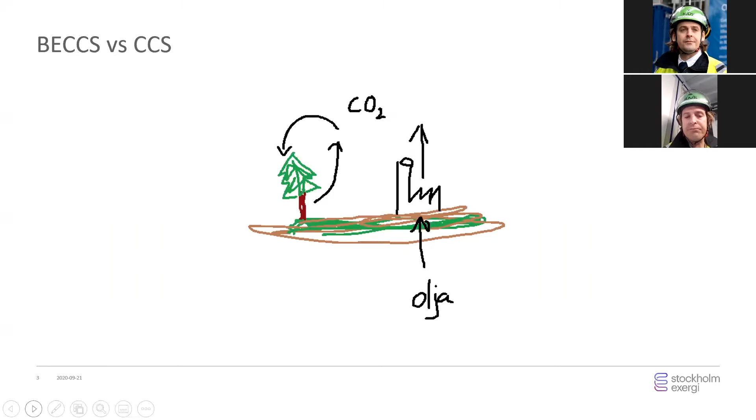While biomass, if properly used, with sustainable forestry where you replant trees after you take them down and use them, or trees replant themselves after they fall and are left to rot in the forest, then we have a circulation of CO2 from the atmosphere to the biomass and then back to the atmosphere. So that's the basic. Let's take the next slide, Jonas.

When we talk about climate change abatement, we have two options. We can reduce fossil emissions—basically switch to other products, or stop using fossil fuels. Or, as in carbon capture and storage, we take the emissions from fossil fuels and put them back in the bedrock. For those emissions that for various reasons we can't reduce, we can counter them instead. That's why we talk about bioenergy CCS.

Through photosynthesis, as trees bind carbon from the atmosphere as they grow, that gives a cycle of carbon atoms from the atmosphere to biomass that collects all the carbon, and then we can store it in the bedrock. So in climate change abatement, we have two options: we could either reduce emissions or counter them with these so-called negative emissions. Biomass CCS is one of these technologies that provides a flow from the atmosphere into the bedrock.

Instead of a tree, we could put a factory instead, and then we'd have what is called direct air capture, which uses membranes or something else to catch CO2 directly from the air. But the whole thing biomass does is concentrate all of that CO2 that's in the atmosphere into the cellulose, and then it's possible to use it.

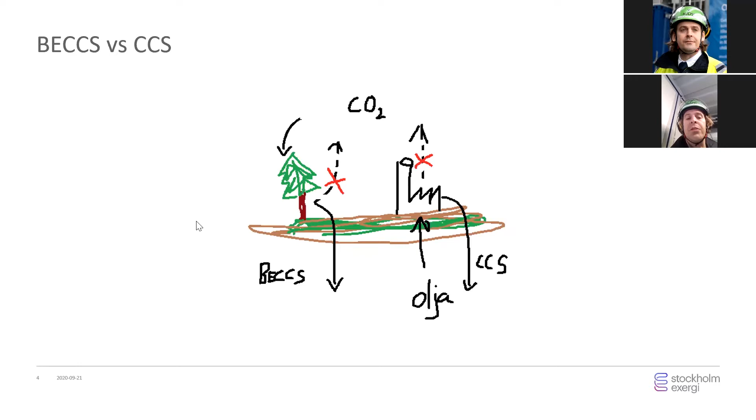So next slide. When talking about climate change abatement—and sorry for some of the headlines being in Swedish, so this is a little bit Swinglish in this short presentation before I show the test facility we have—the background for BECCS is that almost all pathways that provide solutions to meet the Paris Agreement require these negative emissions.

So there are emissions that we can't reduce because there's a lack of technologies, or a lack of economically feasible options to reduce it. In Sweden, a governmental inquiry has, for example, seen that you have these diffuse emissions from the agriculture sector.

For example, as you plow agricultural land, you have a release of nitrous oxide, and that's very hard to get to. So if you want to address all of these things that you can't reduce for various reasons, like in the agriculture sector, you might want to counter it with these measures called negative emissions. Globally, we're talking about quite a lot in all these scenarios that IPCC works with—they have these big models that they run, trying to find solutions for how to reach the Paris Agreement.

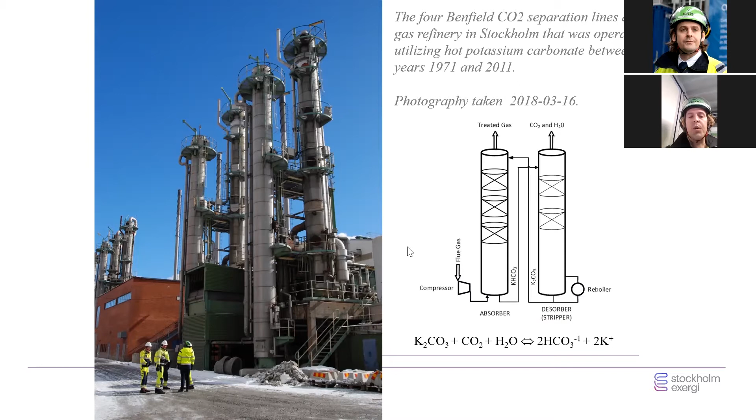In spring 2019, in the spring budget, the government added some money so that you could provide these test and research facilities and demonstration facilities for testing this carbon capture technology. So what we did is we supplied an application to the Swedish Energy Agency, which was approved in August, and in about 4.5 months we could build a test facility to actually test this technology. And I'm standing in it right now, which I think is really cool.

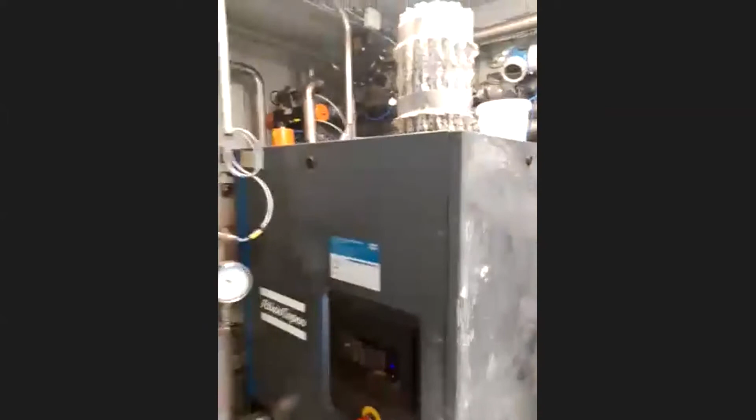And it looks like, if I'm able to turn my camera around... it's always interesting when you do this on the mobile. So the test facility looks like this. You can see Jonas sitting in one of the corners right there. I'm just going to change this screen.

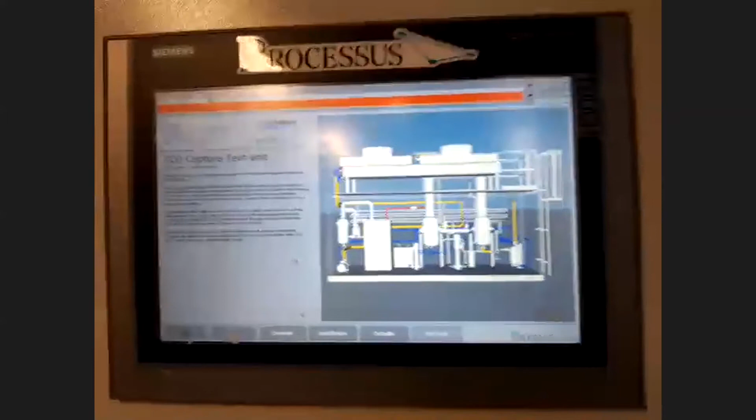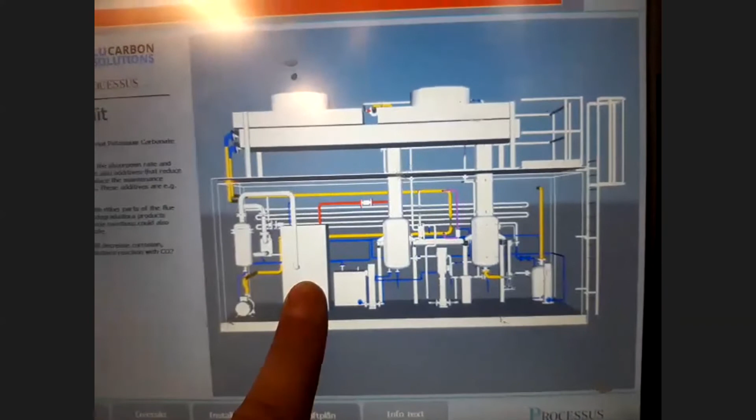And this facility looks like this. What you have here is basically the same thing as we had in the gasworks here in Stockholm previously, that was operated for a very long time. So we take the flue gases in, and it goes into this regular Atlas Copco compressor and compresses the flue gases to around 6-7 bars.

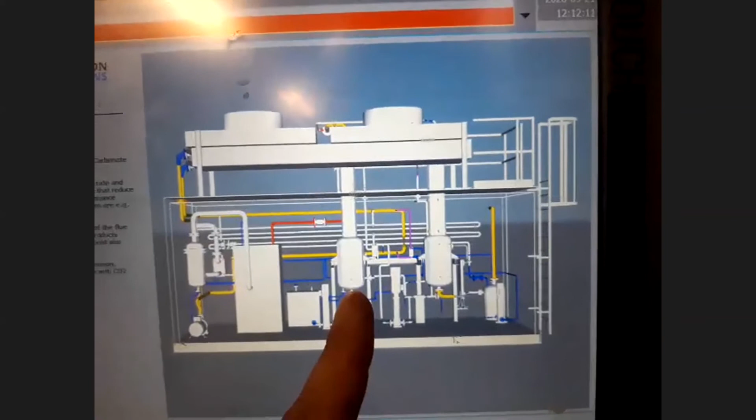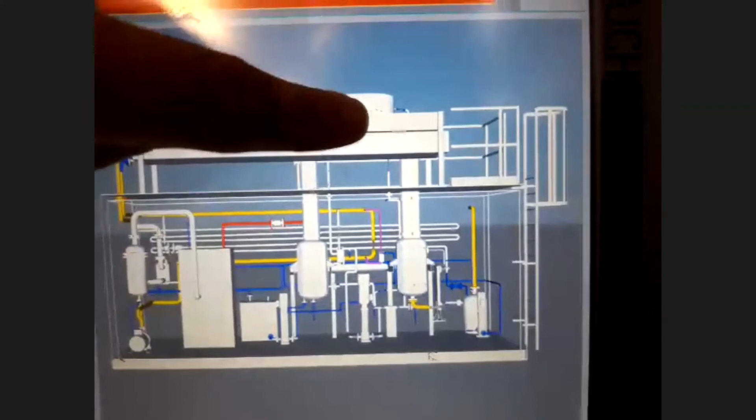Then it's taken into this absorber that's here, where the flue gases come from below, mostly nitrogen gas, which is sort of the normal compound of air, and then you have 18% carbon dioxide. The carbon dioxide then goes up into this absorber with the nitrogen gas, and the potassium carbonate flows from above like this, and they meet with each other. Then you have a reaction of this. Here is the actual absorber and the compressor.

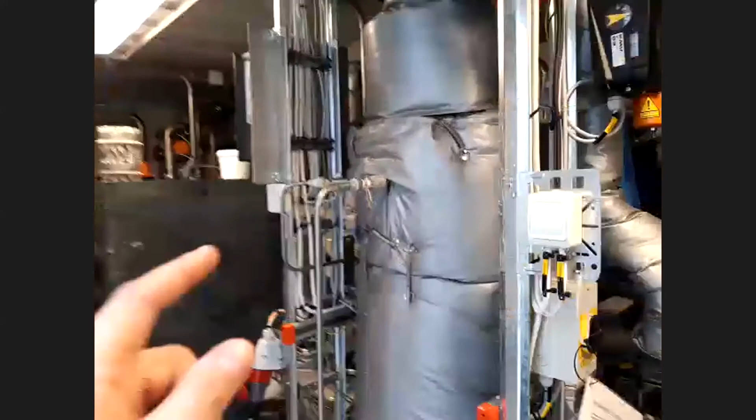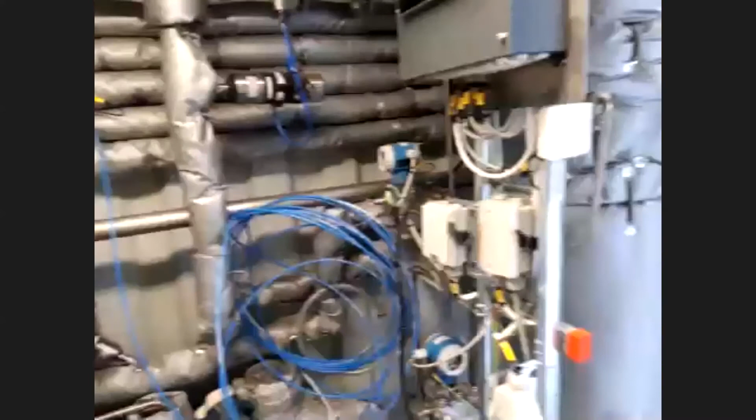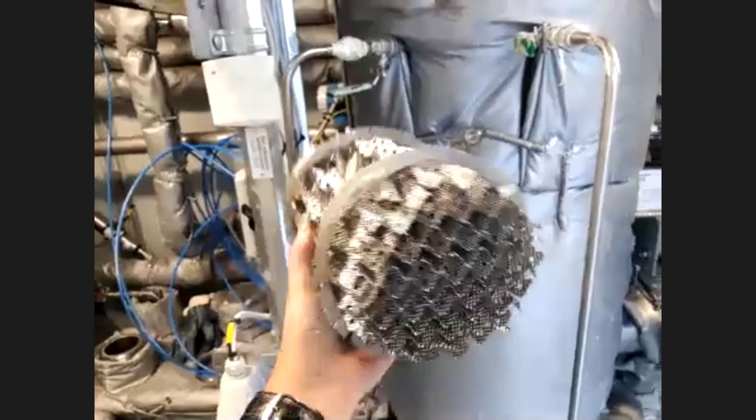So the flue gas comes into this compressor, and then it goes into this absorber. In this absorber, that's just a pressure vessel where you have this kind of packing material. So this is nothing magic - it actually costs quite a lot, but it's nothing strange, or it depends on what you're comparing it with. It's just big cylinders filled with this packing material, about 1 meter of it inside this cylinder.

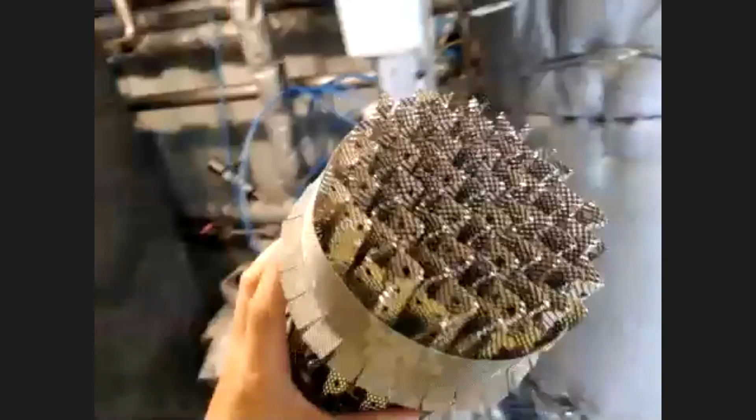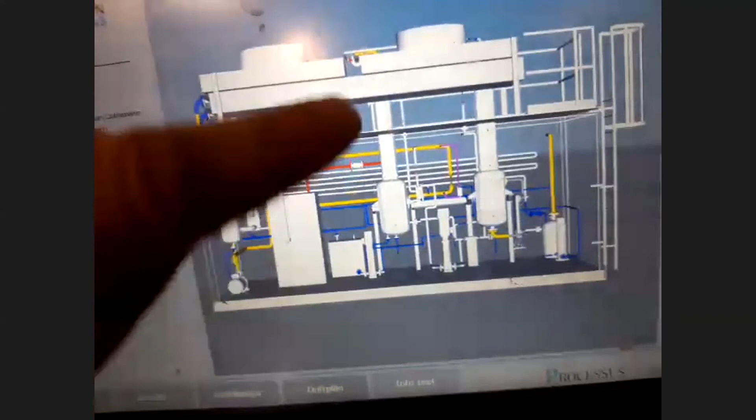This is just to provide a big area as the potassium carbonate is flowing from above into this absorber. You want as much surface area as possible as the potassium carbonate, about 30% mixed with water, flows through this absorber. Then the flue gases go up, and because it's pressurized, you have this reaction where the potassium carbonate forms bicarbonate. So basically what you're doing is creating baking soda.

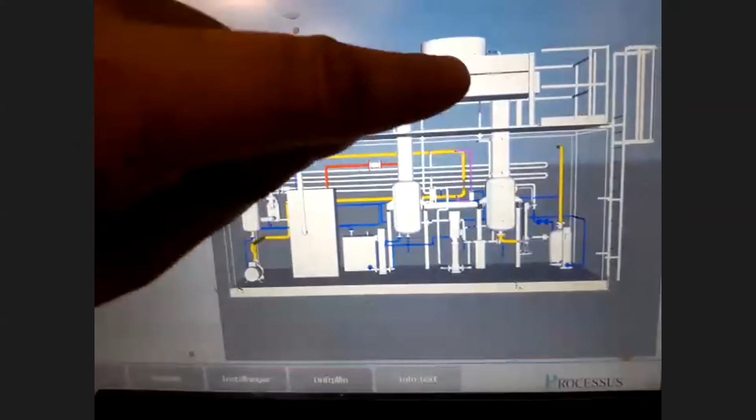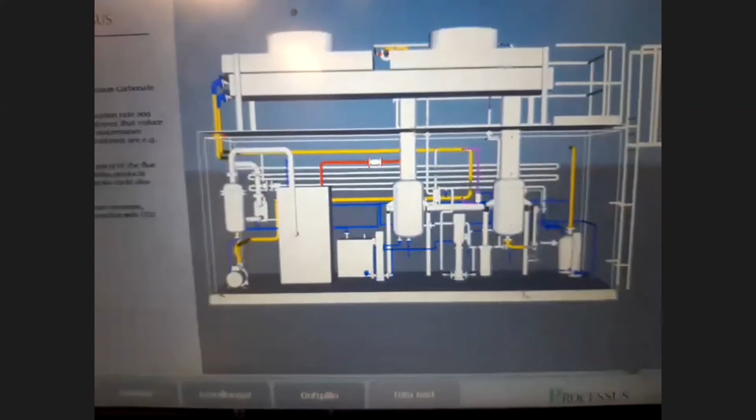Then you pump all this potassium carbonate up above, and let it stream down into this second column, this vessel which is also filled with that packing material. Then you release the pressure to atmospheric pressure and increase the temperature to 105 degrees. What happens is the same as in a baking oven - the bicarbonate releases the CO2, and you have a clean stream of carbon dioxide that you can then transport, compress, and take away.

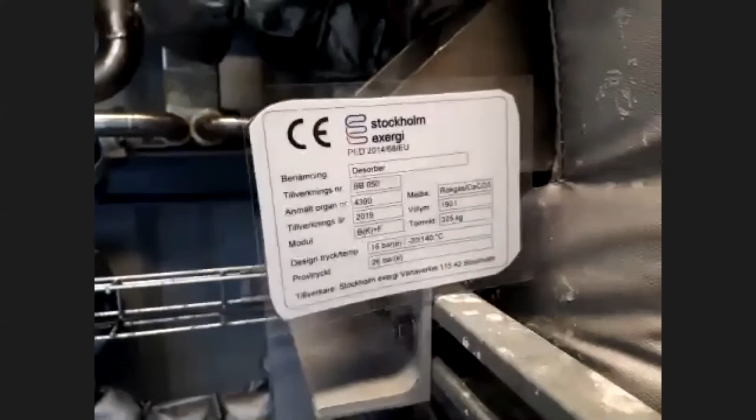So yes, I think it's really cool. This particular facility is also something we're quite proud of. With the help of consultants, as I told you before, we could make this with the help of this mechanical firm in Norrköping called Guidningen. We could make this and produce this facility.

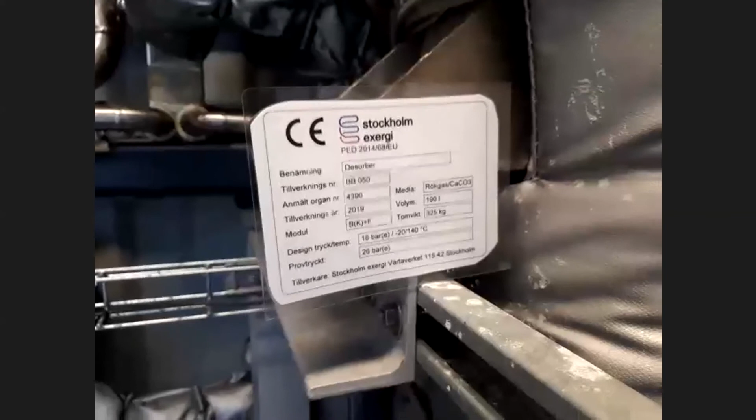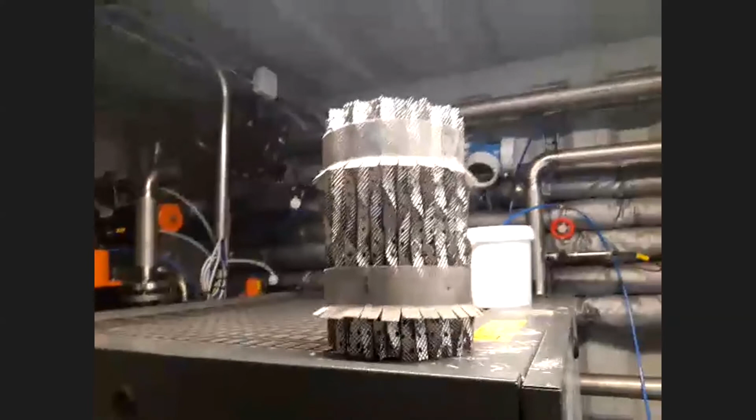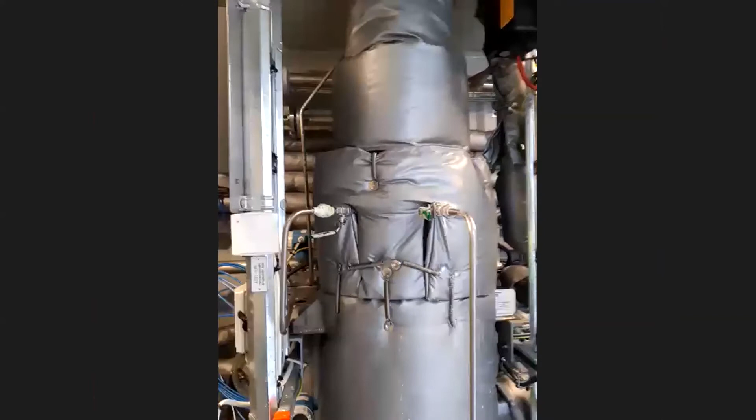And when it was going to be CE marked, they were asking, okay, so who's the supplier of this technology? But we haven't brought any sort of ready technology - this whole facility is created from off-the-shelf equipment. The packing material that the cylinders are filled with is normal Sulzer packing material. We have a normal Atlas Copco air compressor that works perfectly well with flue gases. And these columns are regular pressure vessels, rated for up to 20 bars or so, but normally we operate them at 7 bars, and this one at atmospheric pressure.

What's also really cool, I believe, is what we've done here - we shifted the whole mindset of looking at carbon capture. Traditionally, the whole aim has been finding solutions for capturing CO2 with the least energy penalty, so the focus has been on developing technologies that use as little energy as possible to catch the CO2. And that's because people have looked at condensing units.

If you look abroad, outside the Nordics mainly, all of these big power stations cool away all their heat and only produce electric power. So they're looking at processes where this heat that they cool away can be used to catch CO2.

What we have done instead, and our focus and what is quite unique - though I know other actors in Sweden have also begun to think about CCS or BECCS in a similar manner - is how to catch and recover heat from the process instead. So instead of solely focusing on reducing the steam or electricity used, we're looking at how we can find a process where we can recapture and recover as much heat as possible.

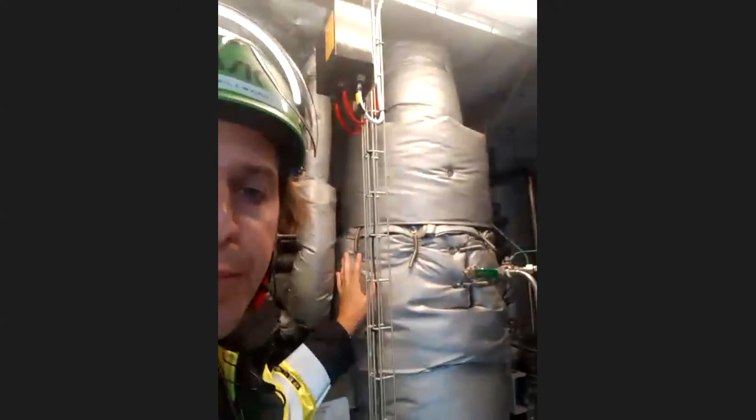What we also would have then is, at the same time as we would create some 100 megawatts of electric power as we run this facility, we still lose somewhere around 20-30 megawatts. So we lose a lot of electric power, but because we have this absorber - the baking oven - that operates at 105 degrees, which is a very good temperature to recover heat into district heating...

That means all energy used from the compressor to the absorber and desorber can be recaptured in the process. And what we see is that this energy penalty we talk about, for a condensing unit, is somewhere in the range of maybe 10, 15, or even 30% - you lose that of the electric power.

Here we take electric power, but we can get it back as district heating. So the overall total efficiency only drops 2 to 3%. That is what's really unique for us and what makes this process really interesting.

I know that some of the big players abroad have actually started to think about turning condensing units into either industrial combined heat and power, or even thinking about district heating in relation to carbon capture, because there are fundamental benefits of looking at carbon capture in relation to where you can actually recapture the heat - either for other industries that you could form an industrial cluster with, or because you have district heating.

I also know that there are some industrial plants right now looking into whether, by optimizing the temperature levels for recovering heat, they can recover heat that's usable for the process, even though they use some primary energy. Of course we still lose some electric power - that's still a problem with using this compressor. But another good thing with this process is that it's quite flexible.

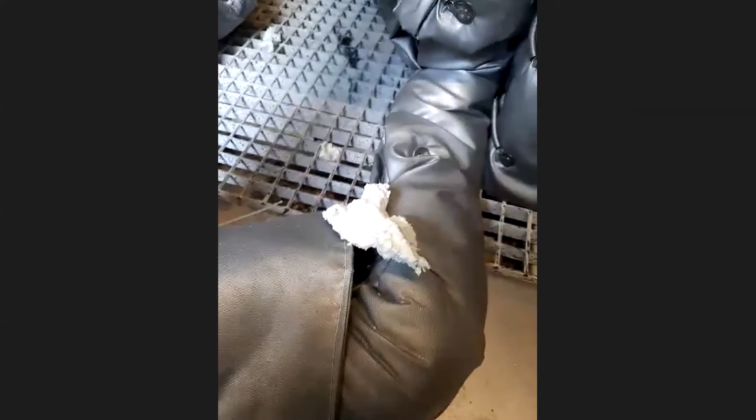And potassium carbonate forms a salt. I think they actually have this - you can see here a salt that's formed by the potassium carbonate. It's basically this baking soda thing. So you need to empty it and replace a little bit of this.

And you could also have some of the smaller things in the process that would get some traces of - well, you have particulates in the flue gases and some other things that are really low in our case, but still could form salts with potassium carbonate. So about 10% per year needs to be replaced.

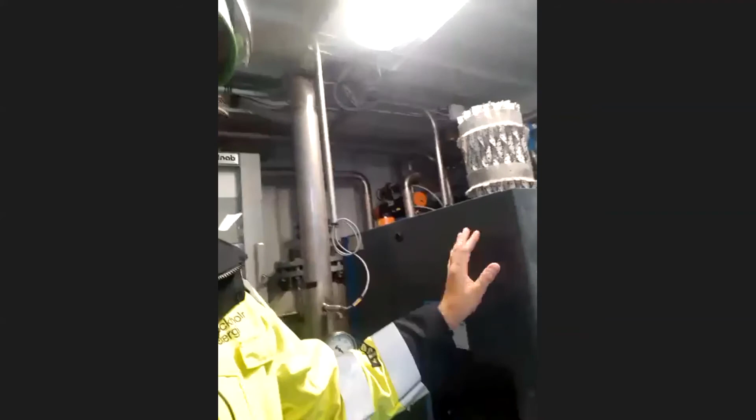I think this is the big thing where we lose electric power. This is a test facility - we wanted to evaluate degradation and some parameters, and there is a lack of fundamental data. So what this test facility has told us is that yes, we can run this technology, we can capture CO2, and we won't get any unforeseen degradation.

But if you want to do this in an optimal way, there are a lot of gaps in knowledge that you can only get through trial and error, because these chemical reactions are extremely complex. If you don't have a reference point, you don't know exactly what will happen. So there's still a lot of research required. We know that we can do it, but if we want to do this optimally and reduce the energy as much as possible, more research is needed.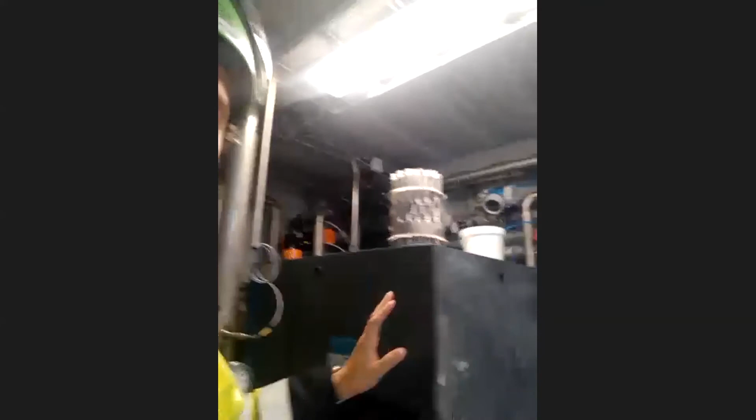If we talk full scale, the compressor becomes a big house, and the absorber is actually 7 meters wide and 65 meters high, instead of now where the inside is about 1.5 decimeters, some 2 meters high with 1 meter of reactive surface. So at full scale it's a lot larger.

At full scale we're talking about losing maybe 20 to 40 megawatts of electric power. The power output normally is 135 megawatts of electric power, and basically all of that could be affected - but that also includes liquefaction, so compressing and cooling the CO2 so it can be transported away. That's also included in this 20 to 40 megawatt number out of 135.

And then you could get basically all of that back - so you only have about a 2% overall reduction in the total efficiency of the plant. All of that lost energy could be recovered as district heating, and you would replace other units in the district heating system.

That's about full scale - the full scale unit is some 400 megawatts. It utilizes about 2.5 terawatt hours of wood chips - this secondary biomass, which is branches and tops, plus other discarded wood, bark, and sawdust. So 400 megawatts, about 2.5 terawatt hours per year.

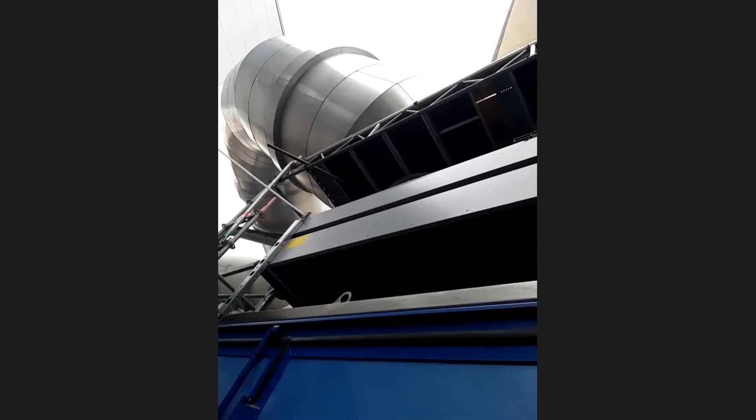You could actually see - let me turn the camera around - above me is this big pipe. This big pipe comes from the CHP, so here you have all the gases, and then we have a connection into that pipe where we draw out some of the flue gases into the test facility.

So this is after the whole plant, which basically means that you can retrofit existing units with this capture technology, and you can also do it with a little bit less energy penalty.

What you have is the nitrogen gas, the N2, and then you have CO2, so that's basically the flue gases. What you do is you take this CO2 out, and then you have the nitrogen going up through the absorber, and then you let it back into the chimney and let it out with the rest of the air. Nitrogen is what the air is composed of mainly.

That is probably the easy thing to do. If you want to reduce the energy penalty, I know that Vattenfall in Schwarze Pumpe were looking at something called Oxy Fuel. What you do then is put an oxygen factory in front of the power plant, so they run the power plant only on pure oxygen. Then they never get the nitrogen gas into the power plant, so it won't pass through the whole power plant and back into the chimney. Then you would have a lower energy penalty in this regular condensing power station that you have abroad. So that's a good solution if you are abroad.

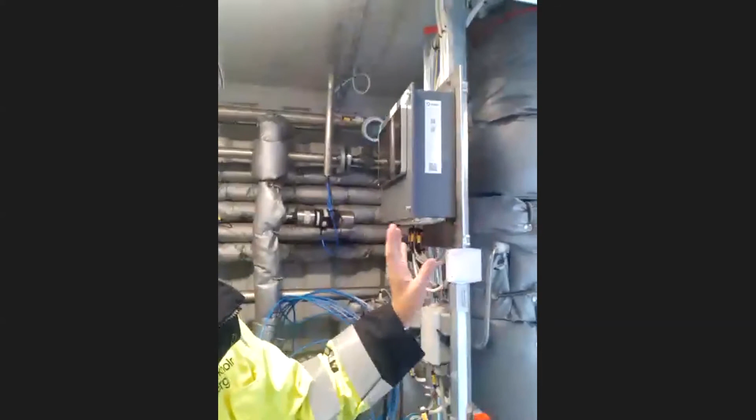Still this potassium carbonate process is not for condensing units, the energy penalty would be too big. This is only good if you have a need for the recovered heat, so into district heating, or if you can use it for some industrial process in this more industrial CHP application. But for these other options, if you have a regular power plant, then Oxy Fuel might be best for them. I don't actually know for sure, and I think it will differ between different places.

The other thing that has been looked at a lot is amine technologies, and amines have been used in the natural gas sector. The downside with amines is that they are more complex. They could form carcinogenic substances as they react with different things in the flue gases, and they are also not as robust as this potassium carbonate.

The difference is that amines, instead of using pressure to have this reaction, use a temperature difference. The main thing in our process is this compressor, that we compress the flue gases, and we work between 7 bars and atmospheric pressure. That's the fundamental of this.

In an amine system, you would instead cool the flue gases and everything. Then in the absorber you would have something cold, and then you would boil off the CO2 from the amine. That's a totally different process.

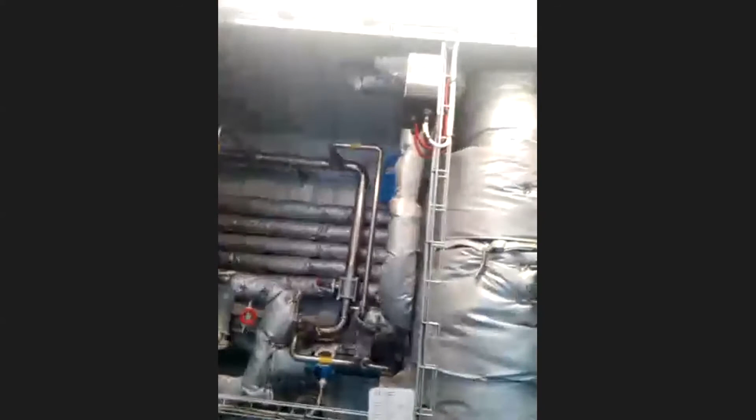From what we can see, that would be more expensive for our case. The cost per ton would go up, and it would also be harder to work with because it's non-pressurized, more complex in many ways. You could also have higher capital costs - even though you don't need a compressor, the overall capital cost could still go up. And amines are proprietary to different organizations, so you need to pay license fees or pay someone actually manufacturing the amine, while potassium carbonate is something you could find readily around.

Totally different question from Carl, who is wondering what's the velocity, in meters per second, of the gas in the absorber and desorber. I have no idea - I have some engineers that I could forward the question to. If you send me an email or a message on LinkedIn or something, I can look into forwarding that to some of my colleagues, because that's more specific than I know of, actually.

So. Excellent - sorry to disappoint about that.

Something you might have touched on already - the question is, how should potential rebound effects be avoided? Like more CCS would, so to speak, leave more space for fossil fuel combustion. Yeah, I think that's a tricky one, and I think everyone working with it doesn't really know the exact answers.